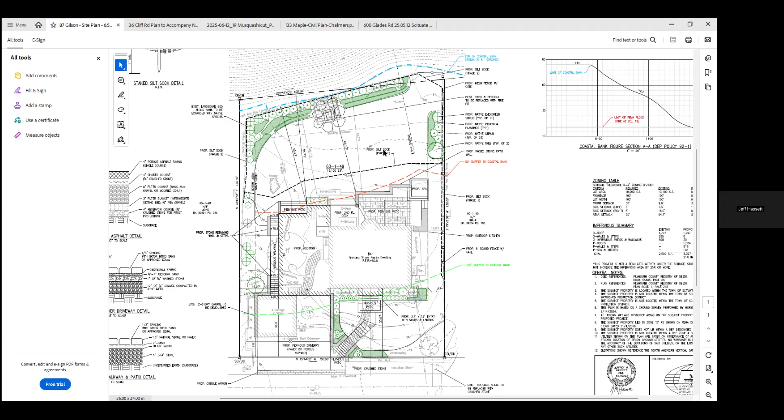Maybe it's just me, but I am not seeing erosion control in the backyard. Way out? Yeah, Penny, are you looking at the June 5th plan? I thought I was.

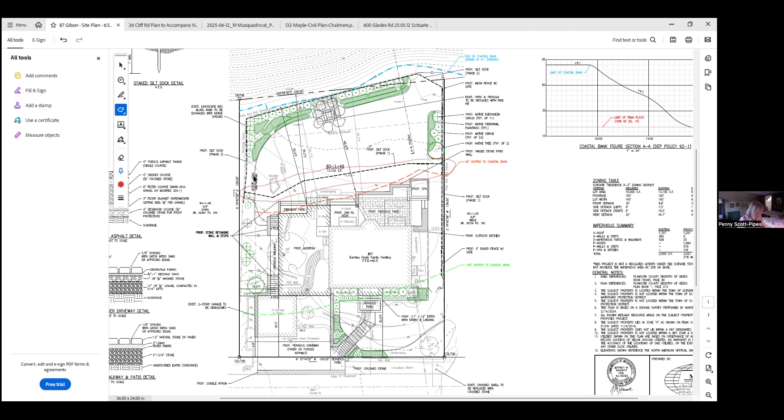No, all right, I'll go up here. Oh, okay, I see it now. I'm sorry, thank you very much.

That to me is a big concern, that when you do work like that so close to the finished project, in order to work on it you've got to get out there. But you will fix anything that they mess up, right? Yes, everything will be restored as grass or landscaping.

Brendan? Okay, sorry about that. Um, yeah, so, I guess I'm a little bit behind. Want to flip to Jen for a second, or are you good? Yeah, I guess if you could. Yep, Jen, sorry.

I didn't have a chance to read any of the detail in the landscaping if it was provided. Is the size of these circles indicative of it being like a bigger tree going in, or a bigger planting? Yeah, exactly. If you see over on the right, there's a leader that says proposed native tree, 2 of 2, and above that, proposed native shrubs, typical of 53.

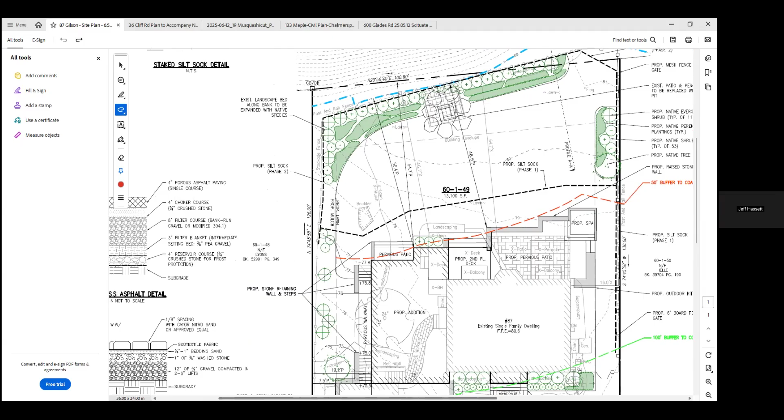Okay, by pervious, how are we defining pervious? What is it made of? We have a detail on the left side of the page: 12 inches of 3/4 inch gravel, then 1 inch of 3/8 inch washed stone above that, and then 3/4 to an inch of bedding sand, and then the pavers. So you have quite a bit of permeable gravel and sand below the pavers. And then for the joints, we call for 1/8 inch spacing with Gator nitro sand.

Okay, but the actual pavers are not pervious. No, they become pervious with the joints and the material below. Pretty tight, yeah, it's an eighth of an inch.

Do we know how much flow will go through this system that you have here? We have a lot of success with it when it's laid flat like it is here. Water lands on it, collects in the joints, and goes in. It works really well.

It works great in flat areas. Basically, okay. And then for the driveway, you're laying asphalt? No, for the driveway we're calling it out to be either pavers or porous asphalt, which I think will work well there too since it's another flat area. The homeowners have agreed to do a pervious driveway but haven't decided between pavers or porous asphalt, so we gave them both options and detailed both on the plan.

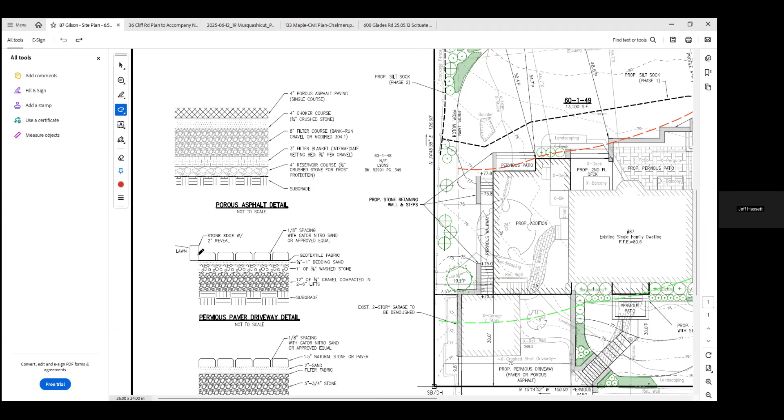So I guess you could call these plantings mitigation, but they were really just proposed for aesthetics—for instance, they will still be native plants. So whether it's semantics of it being a mitigation plan specifically earmarked for a certain square footage, I guess would be the question maybe you're asking. It's just a good, solid amount of plant material.

There is a very minor incursion into the 50 with permeable paving. Right, I know it's minor, but everything seems minor in the beginning, until it's a little bit more, a little bit more. No one generally comes back from there.

But there's, what is that, a 24-inch tree being taken down for the addition? I'd like to make sure we're accounting for this area that I guess is lawn. It is lawn. Yeah, there's a lot of lawn, but now we'll just be building. So I think that's all I had to say. Thank you.

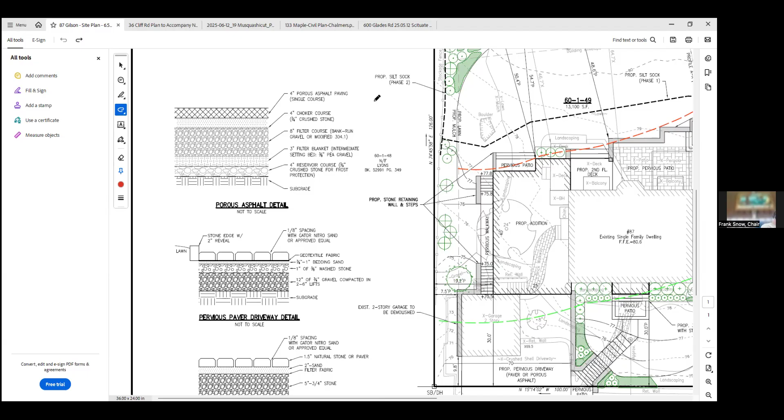Okay, so I guess there are a few things we can clear up. If we start with the Gilson Road side, is that two-story garage being removed? So the garage is being removed, and in its place will be a driveway. Where there's a retaining wall and an 8-inch tree, that's all coming out, and that will be driveway. So is the addition a garage? It is, yes. So the garage is going under.

So there's a building being removed that's in the 100, but it's being replaced by a much larger addition on the side. Right now there's a crushed shell driveway, and you're proposing to remove that and install either a pervious paver or pervious asphalt. That's the proposal, correct.

And then there's like a little line along the side that goes out to the mailbox. What is that, like a little retaining wall? And that's being removed or staying? That's removed, that's to be removed. Okay, and then it's being replaced by the other retaining wall and steps, that's correct.

So then on the other side of that, there's a brick walkway or some sort of walkway going into the house, and it's being replaced with, is that a set of stairs? Yeah, it'll be stairs there. There are already some stairs existing. It's just going to be essentially rebuilt, redesigned, and tied into the existing stone wall at the front of the property along Gilson Road. Got it. There's an existing retaining wall that ties back to the existing garage that's going to be removed.

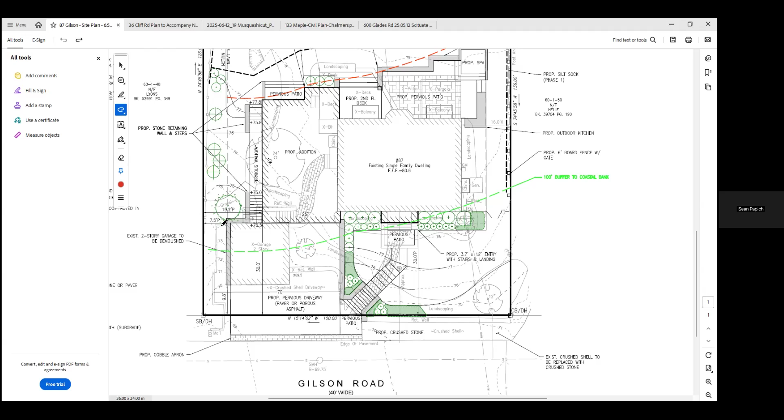So then moving to the back, there's an outdoor kitchen being added, and that's between the 50 and the 100, a proposed spa. There's a patio being removed, but it's being replaced by a larger pervious patio, correct? Yeah, correct, with a raised stone wall that's starting to hit on the 50. Correct.

And then there's a piece of landscaping and maybe some deck that's in the 50 that's being removed, correct? And then what you're going to put in is some plant area, with a couple of steps, and part of that stone retaining wall is going to be in the 50. Yeah, a little bit of that. Okay, so for the commission members, there's a small corner that's out in the 50, that 48.6.

But they're removing part of the deck and landscaping that encroaches more on the 50, I think is right. Okay, and then with the new addition staying, it's actually touching the 50 at the corner of the addition, but there's a deck being removed. And what's the BH? Bulkhead. Okay, so the bulkhead's out, and then there's a small pervious patio with a couple of steps that goes out, and then steps and a walkway, and steps back down on the left.

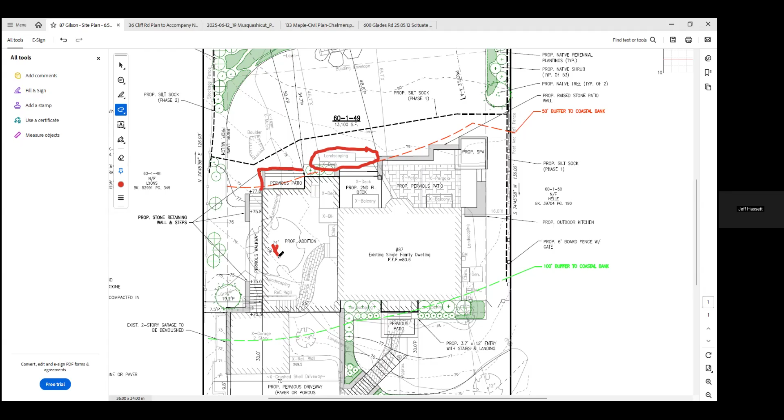And as Brendan points out, there's a pretty large tree being removed in that process. Is that pretty well? And then you have a pergola with a patio, and you're removing that and replacing it with a fire pit with large flat stones around it.

And then is there plant material now in those corners where we're showing the green? No, that's all grass. There's a little bit in the corners on the left, but on the right, around the fire pit and a little to the left of it, all that area on the right of the fire pit is not. We get back by those circles up against the top of the coastal bank, essentially where you see some of the Montauk daisies, and some of the other ones are in there. So we're creating a little more bed to the face of that to add these plants.

Jen was just good enough to give me an aerial of it so I can see that. Yeah, and I put an aerial up on screen for anybody else who wants to see what Frank's looking at. Well, okay.

Frank, can I chime in? Yes, please. Yeah, so after looking at the existing aerial, and I am embarrassed that I overlooked that 24-inch tree, I do think that there's a need for more mitigation in this. I really appreciate the work that's gone into it so far, it's a solid plan, but there is encroachment in the 50, and that 24-inch tree is rather meaningful.

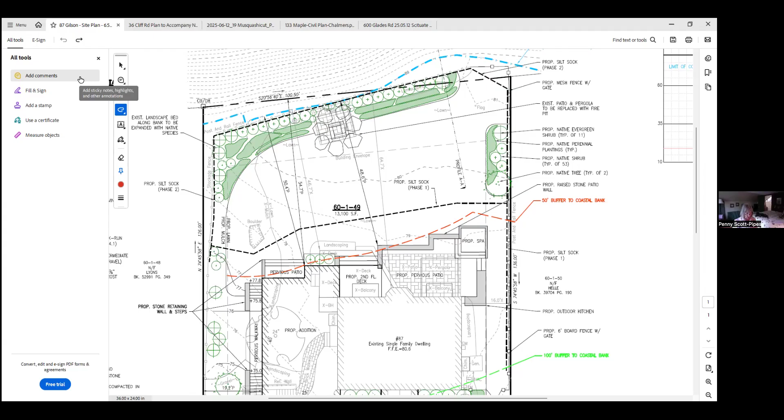If you're going to change the surface, you have to come to us. We would just say this is what the condition is, and if you want to change it, come to the commission. I think that would have to be a significant amount of mitigation, just so that's noted as the direction we're in.

I think we'd like to get this moved along tonight, but we need to make sure we have a condition for a more detailed and significant layout of those plantings, and maybe get a couple of members to review that. For the driveway, tonight we're looking at crushed shell and discuss it with your client. If you come up with something, whether we have to amend the orders or a minor modification, we can consider that.

Jen, are you good with all the comments that were made? I am, I have my notes. I don't see anybody's hands raised. If you are ready, I would say close and issue. Anybody else, Penny or Jen, Brendan? All good. Okay, so I'll make a motion to close and issue 87 Gilson Road. Do we have a second on that? Second from Jen. All in favor? Brendan, yes. Frank, yes. Thank you.

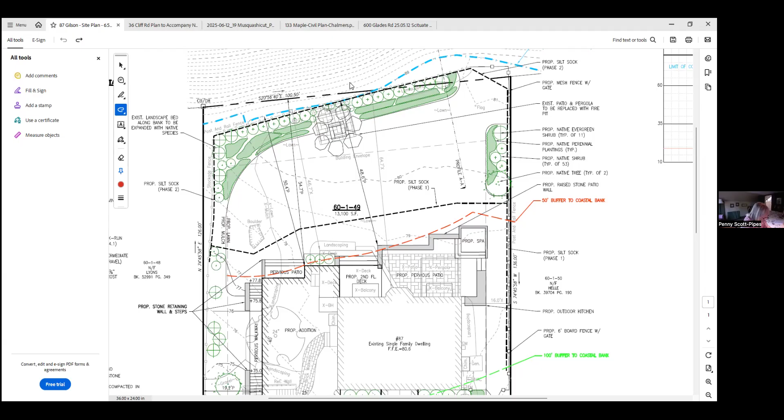On June 16th, 6 p.m., the Scituate Conservation Commission will hold a wetlands hearing under Chapter 131, Section 40 of the Mass General Laws and Section 30700, Town of Scituate Code of Bylaws, for notice of intent filed by David Burnham III, for stabilization and repair of a revetment located at 36 Cliff Road South, Scituate. Abutters and other interested parties are invited to attend. Information to access the meeting is available on the agenda on the website.

And we have Jeff Hassett. Thank you, Jeff Hassett here again. So this is another NOI filing to stabilize and repair a stone revetment and a bank. The property is 36 Cliff Road South, located in Humarock at the northern end where Central Ave splits. You go off to the right, and this is one of the properties on the right-hand side on the bank that goes down to the ocean. It's abutted by residential homes on either side.

The resource areas on this property: the beach is a barrier beach, and at the bottom of the bank is land subject to coastal storm flowage, which is a FEMA velocity zone elevation 23. Then you have a coastal bank coming up to the lawn area in the developed portion of the property. On this plan, we're showing the proposed work in plan view, as well as in photos, which I think tell the story really well. We're here for the NOI filing for repairs to that bank and the revetment.

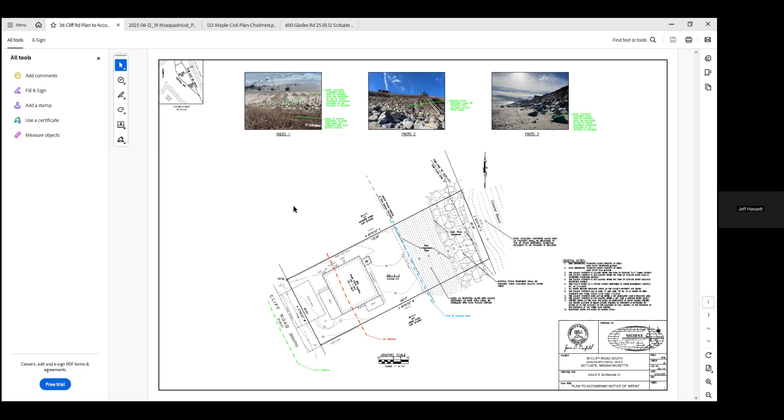Okay, so we're going to continue this? Doesn't sound like this is going to happen until the fall. I'd like to get a little bit more info. Jen, we can continue to July 21st - we really just kind of filled that one up - or August 4th. Jeff, if you could keep it on the 21st, I think it should be pretty brief.

Sounds good, take a motion. I make a motion we continue 36 Cliff Road South to July 21st. That's by Penny. Do I have a second? Second from Jen. All in favor - Brendan yes, and Frank yes. Thank you, Jeff. Thanks everyone. And we already continued 85.

We're going now on to 19 Musquashicut Ave.

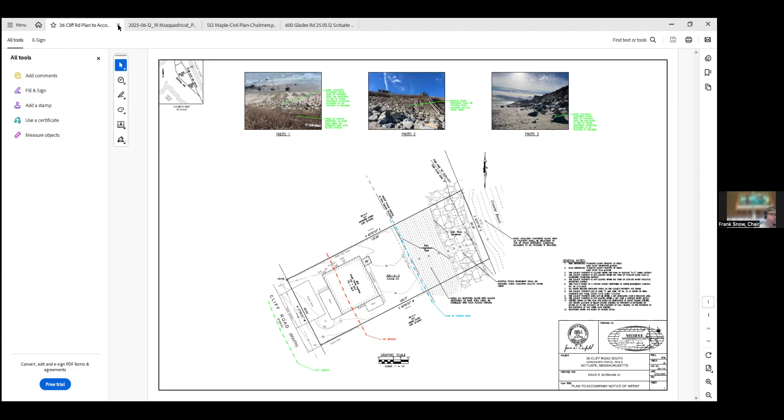On June 16th at 6 p.m., the Scituate Conservation Commission will hold a wetlands hearing under Chapter 131, Section 40 of the Mass General Laws, and Section 307 of the Town of Scituate Code of Bylaws. Notice of intent filed by William Baller for installation of a pool located at 19 Musquashicut Ave, Scituate. Abutters and other interested parties are invited to attend. Information to access the meeting is available on the agenda posted on the website.

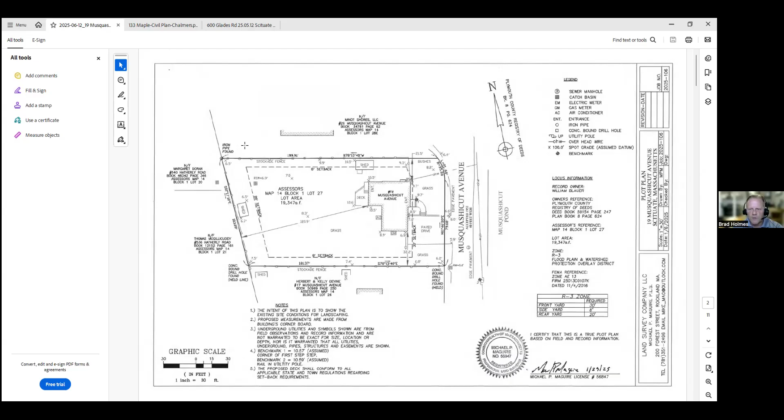Good evening, members of the commission. Brad Holmes from ECR on behalf of the applicant William Blower for 19 Musquashicut Ave. Along with me this evening is Matt Pillis, landscape architect, who prepared the design plans. So with the sheet you have open now, we have a single family residence at 19 Musquashicut Avenue. The property is to the west of Musquashicut Pond. The Musquashicut roadway is in between the pond and the site. So what we're proposing is landscape improvements and a proposed plunge pool and patio in the backyard of the property. We're outside the buffer zone, but we're fully within land subject to coastal storm flowage, so we are within the commission's jurisdiction.

What we're proposing to do is construct a plunge pool with an associated patio, retaining walls, walkways, and regrading of the lawn with landscape improvements to improve the drainage on the property, and also to add more plantings and drainage. We've had some opportunity to coordinate with Jen, and Matt Pillis has updated the plan so that we have a pervious patio, so that we're under 25% and don't have a trigger for stormwater.

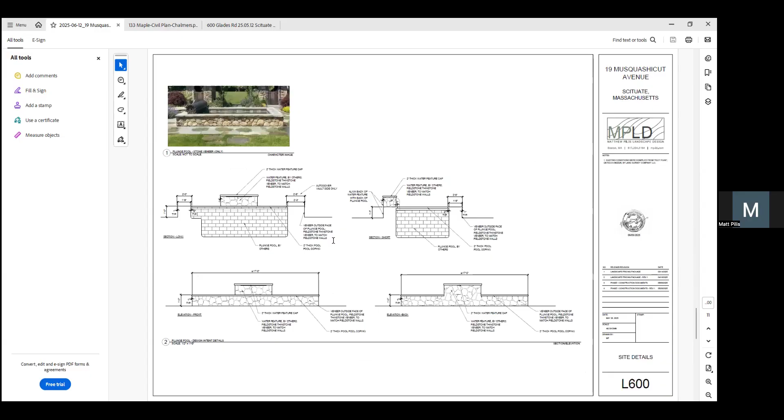We do not have details. Oh, I thought I had it on. Sorry, the pavers are pervious, they're not impervious. Okay, but I can provide a detail for the steppers with the lawn joints.

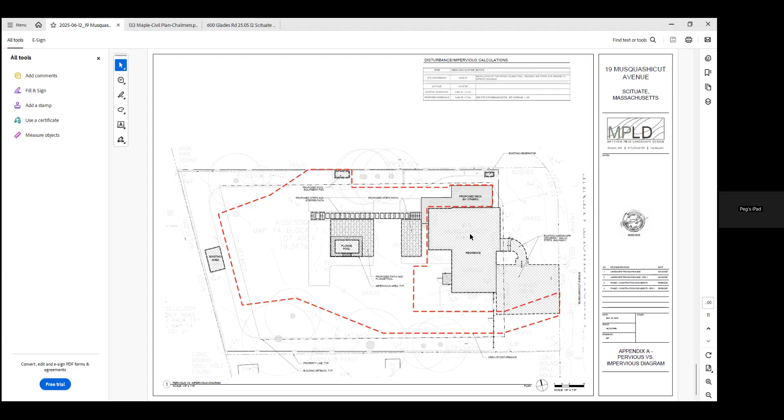There it is. Oh, no, keep going. No, there, right there, stay with that one. So you can see the shots, the grade shots, and then where this is graded to. Okay. Does that make sense?

Yes. Okay, thank you. Thank you.

Let's see, we've heard from everybody, right? Yep, except you. I think given the location and the information on the plan, and it's more of a flood issue, but they've addressed those pieces. I really don't see anything more that can be added to that.

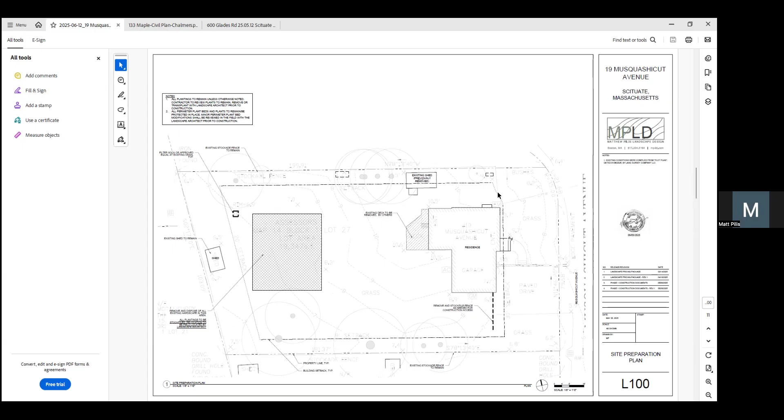Other than, is there a need for erosion control here? I'm just trying to figure out where that could possibly impact. Yes, we will definitely have erosion control prior to the start of work. Is that noted on the plan? I think it's on, if you go back to the first page and confirm. We would definitely put it in our conditions to have the limit of work be erosion control. We noted in the narrative that prior to the start of work, erosion controls would be included.

Take a motion. I make a motion to close, 19 Musquashicut Ave. A second from Jen. All in favor? Brendan, yes. Frank, yes. Okay, great.

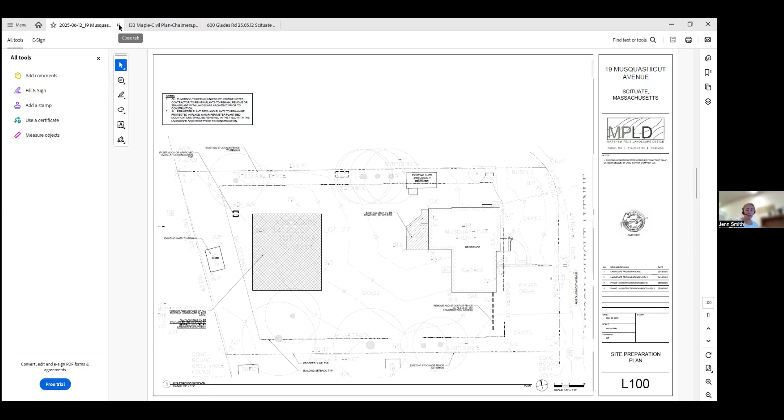Thank you, Frank. If it's possible, can we hear 600 Glades Road next? I have a time constraint. It's the one about the snail research. Sure, I know that's out of order, but we still need to hear 133 Maple Street. Just looking to open that one.

On June 16th, 6 p.m., the Scituate Conservation Commission will hold a wetlands hearing under Chapter 131, Section 40 of the Massachusetts General Laws and Section 30700 Town of Scituate Code of Bylaws, for request of a determination of applicability filed by Christopher Wells for zoological research located at 600 Glades Road, Scituate. Abutters and other interested parties are invited to attend. Information to access the meeting is available on the agenda posted on the website.

And who do we have for that? That would be me, Chris Wells. Good evening, how are you guys today? We're all well. I think if you heard from the start of the meeting, we're going to lose one of our members in about 20 minutes. Okay, and we have one other hearing. So I will be very brief then. Okay, thank you.

To get to the meat of the potatoes, I'm a researcher at Bowdoin College, interested in looking at snail populations across the Gulf of Maine, in order to understand something about these introduced species. In order to do that, I'm installing small fenced areas across these places and seeking permits from all sorts of locations. At this point, I've garnered permits from all sorts of locations from Canada all the way down to Massachusetts. The one you guys are going to care about is DMF. These fenced areas are 28 inches by 28 inches by 6 inches high, 5 at each location. There are 2 locations, one on the south side of the harbor, and one on the northwest side of the harbor, or that embayment right there.

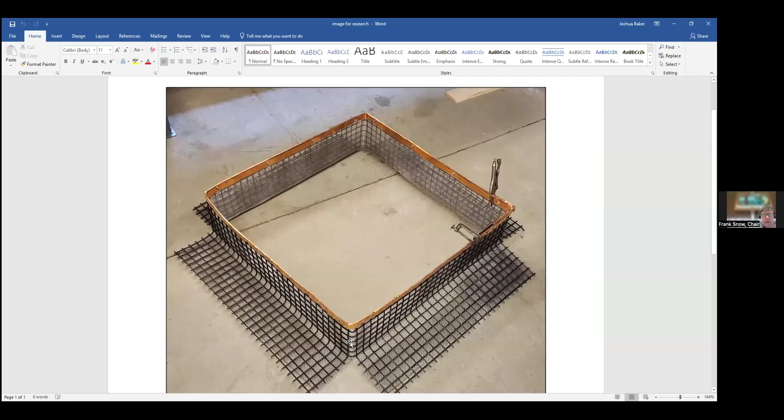I did send a picture late to Jen, around 7:10, I don't know if she's got control or if you guys can share it, but I can show you what it looks like if you're curious. Josh, I saved it in the project folder, it's a Word document. That's the first prototype we just made about 3 days ago, still held together by some clamps.

And then these will be staked in, or lag bolted in, yes. We'll see what happens, I'm very curious. I'm curious how these work with regard to the green crab.

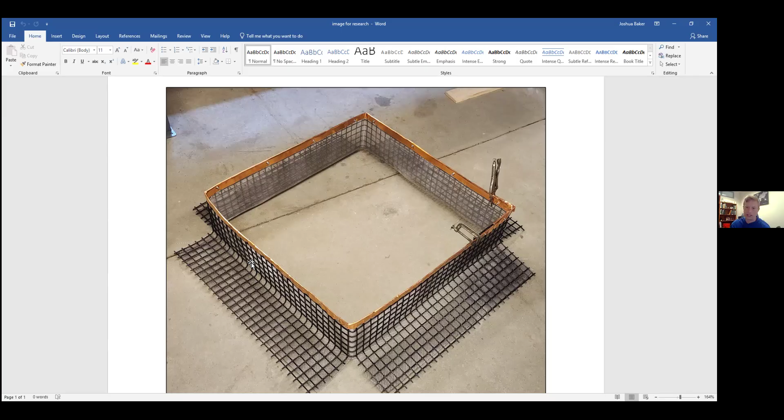This seems to be destroying the marshes. Yeah, unfortunately, these are designed so that green crabs can get in and out. The only thing that hopefully won't be getting in and out of this is snails — that's what that copper barrier is for. So the copper retards them from wanting to climb on that? Yep, they have no interest in it. Exposure to copper, touching it in particular, is toxic to these snails. So it won't be toxic in and around the fenced area, but if they're touching it, it's not great for them. In pilot studies in the lab, they don't cross the barrier, or very few cross it over time, so my monthly or even seasonal visits should be enough to reduce the population.

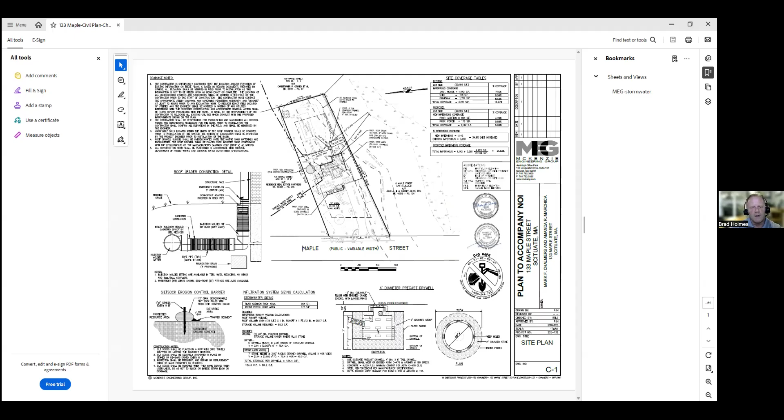I can't see the plan too well on this image. Jen, if you could pull it up. I believe we're certainly outside the 50-foot setback to the wetland, we're partially within the 100-foot buffer zone. The addition is proposed at the back of the house within an existing lawn and landscaped area. Thank you, that's the 50-foot buffer to the BVW. They do have a 100-foot setback to the intermittent stream.

And that's the 100-foot buffer zone in blue, correct. They did put reference to the setback to the intermittent stream. There is no riverfront on the site, but I think that has to pertain to a tributary or to a water supply or something beyond that. So with that, I know there's the proposed porch at the front of the house, and they do have some leaching dry wells for roof infiltration. And with that, I'll bring it back to the commission, and Jen Smith.

Sure. So this project did trigger stormwater, so they have filed for that permit. It is being reviewed, we just received those comments this weekend, so they haven't had a chance to respond to those. The project also needs to file with zoning, which they have done because it is in the Water Resource Protection District and specifically in the Zone A. So this is work proposed within 200 feet of a tributary to our water supply, so that has some special requirements to it as well, trying to kind of layer everything together.

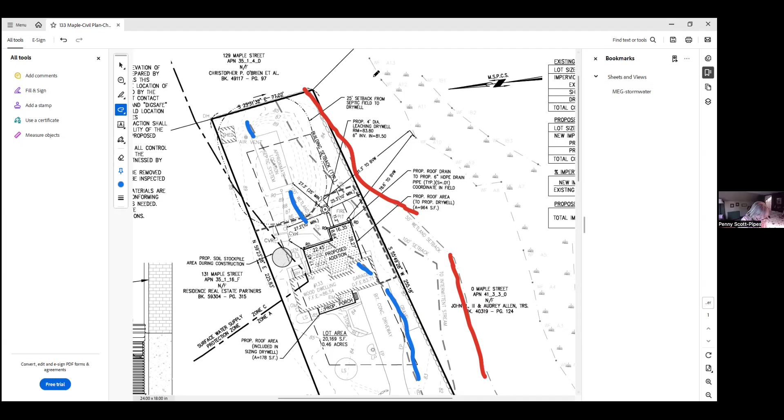Well, it looks like we did it. Everybody, anything else you want to quickly bring up? I don't have my notes, so I don't know. Okay, well, I'm okay with calling it a night.